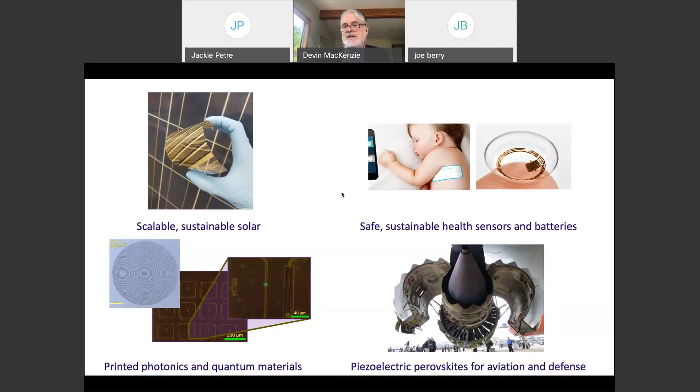Great. And so our work in solar actually fits into our broader picture, all about sustainable manufacturing of optoelectronic sensors and energy devices. And even on this slide, in 3 of these categories, in solar, printed photonics, quantum materials, and in piezoelectrics, we're all seeing these new variants of new hybrid perovskites really coming to the fore. And of course, the reason we're all here is the really exceptional semiconductor performance coupled with processability.

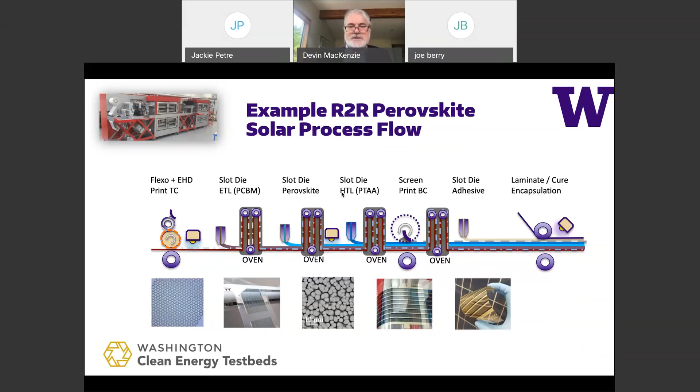And this is one vision of our roll-to-roll perovskite flow. It's not the only one, but it's kind of exemplary. And in fact, we don't just do roll-to-roll. We do sheet-based processing as well, and so we have many users in the lab and researchers in my group and outside that work on sheet-based versus roll-to-roll. So this is not a soapbox to sell everyone on roll-to-roll, and I think most of the insights here could be applicable to sheet-based processing and even other technologies.

And so we'll talk a little bit about the overall roll-to-roll, the key elements for roll-to-roll, and they're really simple: it's all about the substrates. It's inks and barrier, and we've got to worry about lifetime, but the inks, the printing part, the fluid part, although it makes the best pictures, is actually not what I lose sleep over. What I lose sleep over is substrates, cost of substrates, substrate integration, transparent conductors.

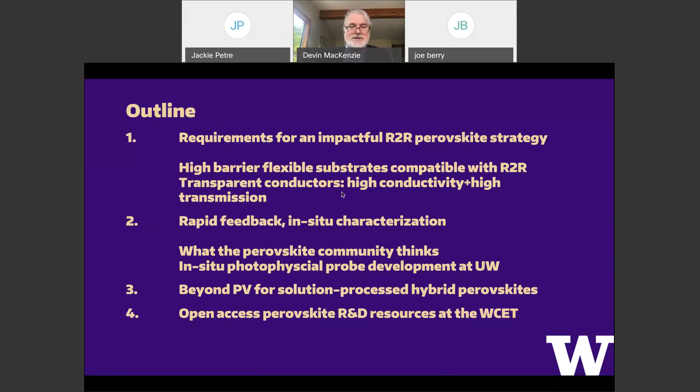Then I'll talk about the in situ characterization work we're doing as part of a Department of Energy funded project we're just wrapping up. And then think about some other applications for solution processed hybrid perovskites and go on and talk about our lab. So kind of overall summary, I think I've shown this before to the audience, but the biggest strengths to me, and I know we're discussing this internally in the USMAP, thinking about writing this stuff up, is it's about low capital cost barrier.

That's, to me, the single biggest barrier to broader adoption of solar, to get solar to be not a few percent of our energy needs, but to be 50% of our energy needs. It's not about another 0.1, 0.2% PCE. It's about reducing the $1 trillion cost barrier it would take to install the manufacturing to actually produce enough solar to supply a significant fraction of our energy needs. And that's where I really think it's interesting. I don't want to just invent another CdTe. You know, we want to go somewhere different.

And the thing that brought me into this was ultra low capital investments to get to really high throughput manufacturing. And of course, roll-to-roll is also inherently flexible. At first, that can be a yoke because it's a challenge, but it can also be actually fundamentally enabling. And that ties in really with the substrate. The challenge is substrates and encapsulation solutions is what a lot of us are thinking about, of course, because lifetime is an open question. But in roll-to-roll, we have additional constraints we want to think about.

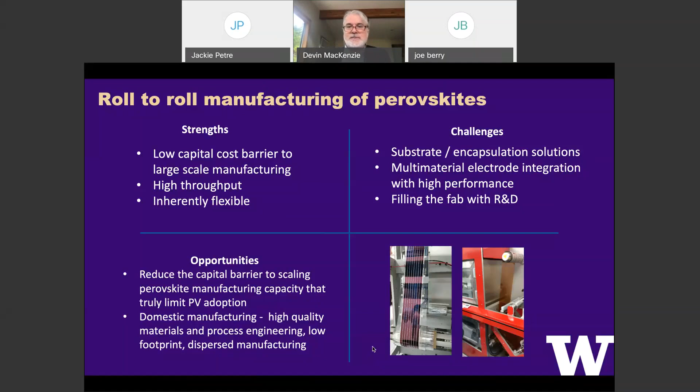But I really think many of us share this idea that this is a real opportunity for domestic manufacturing of PV. It's unclear whether silicon solar cells will ever come back. I tend to not think so. But here we have an opportunity, considering the very, very low capital cost, a workforce need that is not based on low cost, low skill labor, but it's really based on very high precision process engineering, small footprints, can be dispersed in manufacturing. It doesn't have to be centralized. I think that's a real opportunity for domestic manufacturing, and another reason why we're here looking at this.

So first I want to talk about barrier film. So my background, I spent 15 years in industry before becoming a white-haired academic, and I started about 10 companies. I successfully started about 5, got them through the Series A and beyond, at various levels from plumber to CEO and CTO. But multiple of those are in the displays and OLEDs world. And I spent a lot of time working on flexible barrier films for flexible OLEDs. And it's a very challenging picture.

This shows the amount of water molecules per micron squared over 10 years entering from different barrier films. We want a 10-year lifetime. If you're a pessimist, you're going to say that long-term having a water molecule, or maybe oxygen molecule as well, within a carrier diffusion length squared is going to ultimately matter. Maybe it's another way of saying the long carrier diffusion lengths of perovskites and their exceptional semiconductor performance could also make them more susceptible to degradation, because in OPV, the excitons never moved more than 10, 20 nanometers in their life. So if there was no defect in that neighborhood, you might avoid it. Now with perovskites, we have electron wave functions out over maybe microns, maybe even hundreds of microns, which means that they can also interact with defects on a much larger scale. So if we look at that pessimistic view, it can be challenging.

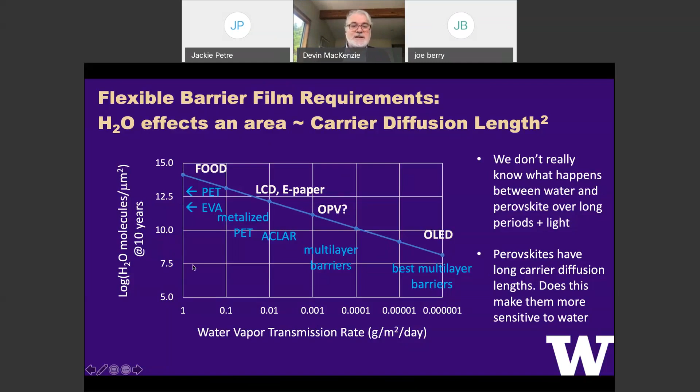We're talking about even the world-class multi-layer barrier films, inorganic-organic multi-layers on plastic, on a polyester, for OLED. Even then we're talking about 10 to the 7, 10 to the 8 H2O molecules per micron squared after 10 years if you don't do other things. Very, very tricky. If we take the more optimistic viewpoint, that H2O degradation is only going to act locally, on each unit cell of the perovskite, say we match one water molecule per unit cell of perovskite. Maybe that's the very optimistic degradation limit: we'll have a solar cell until it literally dissolves. The reality is probably somewhere in between these two extremes. But even in that case, we're still getting near one H2O molecule per unit cell in 10 years. Literally, the film will be, unless we do something different, entirely saturated with the best flexible barrier films.

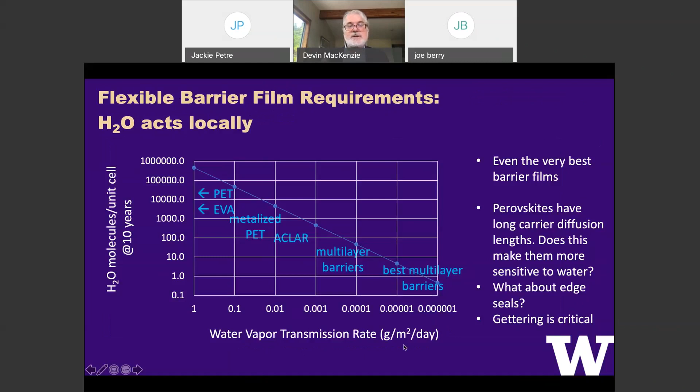And then there's other stuff, like what about edge seals? What do we do to improve this a bit? Gettering. Gettering, I think, is critical. Gettering is fundamental to OLEDs, and there's some really novel ways to use gettering in roll-to-roll that I've worked on, and many others have as well. But even with all that, barrier is not where I place my bets. I think that the real opportunity is in there, and is also a real opportunity in carbon footprint and energy payback time.

That's also an energy investment. But this is not going to use gold. We're going to use copper, whatever. Still, cathode evaporation is a huge fraction of the manufacturing energy consumption to produce PV. And look at

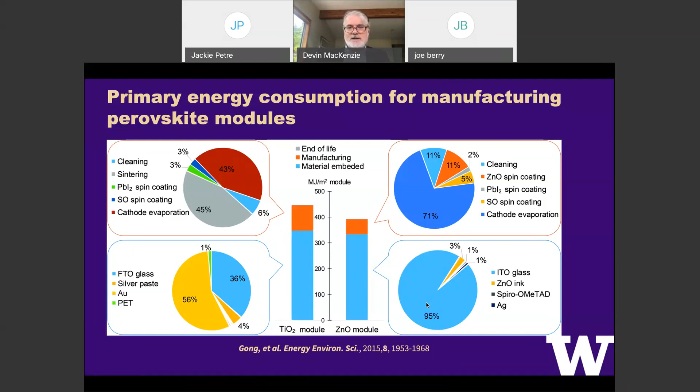energy devices, the majority of it, and the majority of that is just about the glass. It's about the ITO glass. That's where all the energy is. So those are challenges, barrier properties, and this immense embedded energy related to the glass. But that opens up a real opportunity. We're talking about moving to thin glass, moving through processes.

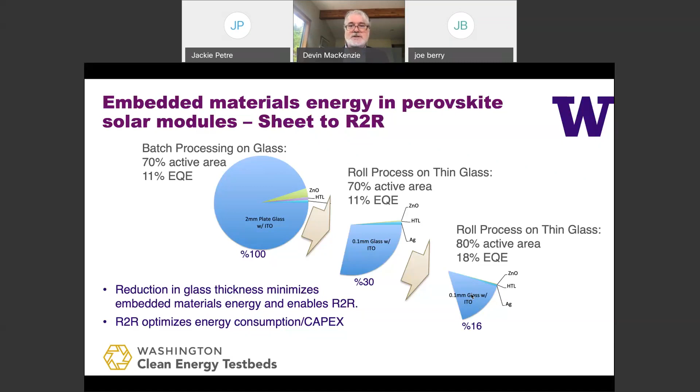As we increase, learning better about edge shields, increase the QE, we can reduce the embedded energy investment just based on using thin substrates, thin glass substrates. Full disclosure, I have a collaboration with Corning, but it didn't happen that they showed up to me and said, here's some money and some substrates. No, I chose them. I saw this is how it's going to work.

My experience in OLEDs and OPV and TFT, flex TFT displays, with moisture barrier films, flex glass to me is the immense opportunity here and a real crucial opportunity. And it touches on several things. Of course, it's thin. 40 micron Willow glass has a rollable diameter of 4 inches, which is quite good. Good enough for most roll-to-roll systems and most processing. It's right on the edge.

And the failures are actually typically extrinsic. They're not intrinsic to the glass. It's not a limitation. It might have something to do with edge defects. It might have to do with shearing, but really extrinsic mechanisms, not the fundamental flexibility of the glass per se, or robustness of the glass itself. I think it can be dealt with from an engineering perspective and overcome. Once we swallow this pill, there's some really great things.

Of course, an extremely high water vapor transmission rate barrier. Permeability of water is extraordinarily low. It's really not measurable. There's really not a technique that can measure how low it is coming out of glass or say thick metal foil. It's many orders of magnitude lower than the best we can measure, which is about 10 to the minus 6, 10 to the minus 7 grams per meter squared per day.

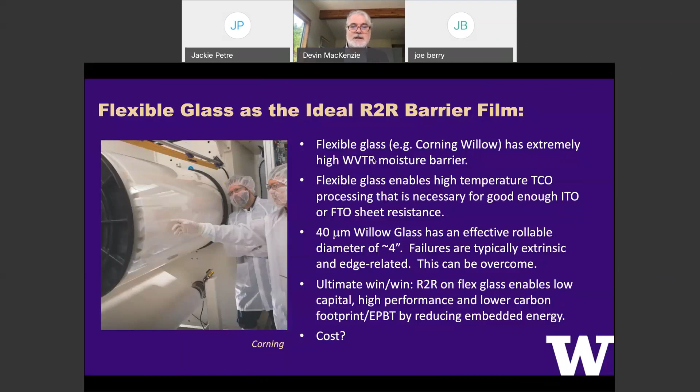So from that, I segue into our next section on in situ photophysical monitors and corrective algorithms. This was a SETO SIPS project. I think we started this in 17 and finally got funds going in 2018, 2019, just in time for a little bit of runway and then COVID.

We've managed to, I think, get some interesting results out of this. And I'm going to talk first about the first stage of this, which was like a roll your eyes. Oh, we have to do stakeholder assessments. That's the new thing, right? That was the new thing at the time. Every grant, you need to do a stakeholder assessment. We grumbled. We set up to do it. Actually, it turns out to be super interesting and maybe one of the best outcomes of this whole project.

So these are confidential names, so I'm not going to reveal who's who, but basically these stakeholder respondents represent a significant fraction of US MAP participants and all the perovskite companies in the US, almost all of them. So we're all there. The interesting thing was thinking about basic stuff we know is important for the process environment.

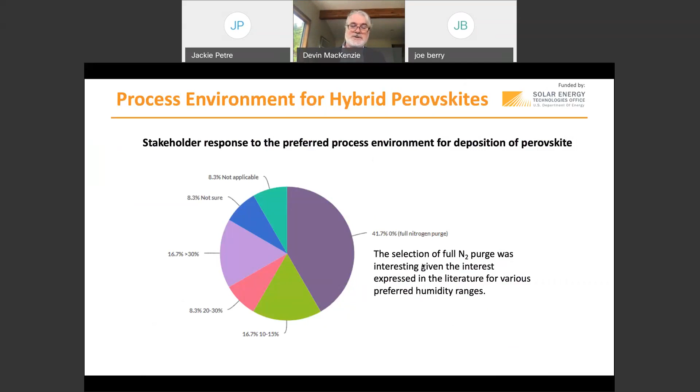Interestingly, the big choice was full nitrogen purge, which I thought was interesting because at the time you look in the literature and people are talking about Goldilocks: there's too much, too little, there's just right, and they wanted these magic windows. But the field actually wants just full nitrogen purge in the environment, and that informs how you would construct an enclosure for roll-to-roll or sheet-based processing. It's important to know. And we developed an enclosure system.

We've worked with what we'll call an air knife, a nitrogen knife. We give the air knife, showing the kind of circular box chamber, locally enclosed, because we only want to have to control the humidity and temperature right near the slot die head and the flow right around the slot die head to have consistent flow.

Up to a full bubbler system, we could actually bubble water into nitrogen to get to a relative humidity. I mean, relative humidity scales are calculated for air, which of course is 20% oxygen and some other stuff. We made water saturated nitrogen and mixed that with dry nitrogen, fed it in at different rates, flowed it on the knife, and we really control that quite well.

With different flow rates we're trying to control at 10%, and within 1 or 2% RH, which is about as good as you can really hope to get. We are able to control extreme excursions when the outside Seattle weather gets to 80% RH externally. But we can also use intermediate room control. We can put rough dehumidifiers in the overall processing lab that bring it down to maybe 50% RH, 40% RH, something like that. Then the local box fine tunes the humidity to what we want.

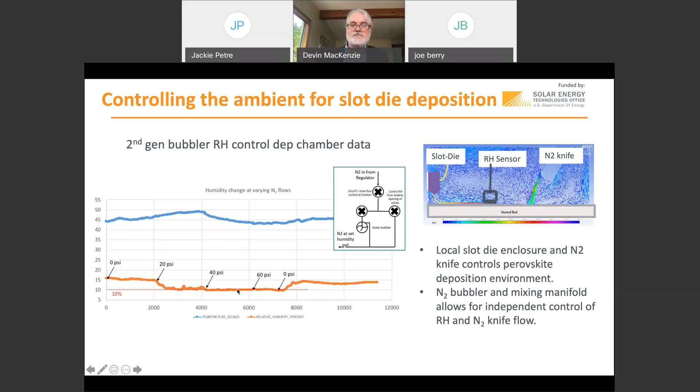It's also interesting to remember that time resolved photoluminescence gives, of course, the minority carrier lifetimes, the basic photophysics, but it's not the only story for making a device. So we can have high lifetime, but not something that makes a very good device. And we'll talk a little bit about that in a moment. We're getting longer lifetimes the more we crank up the humidity, which is the antithesis of where everyone wants to go in devices, and everyone's seeing the best devices at low humidity.

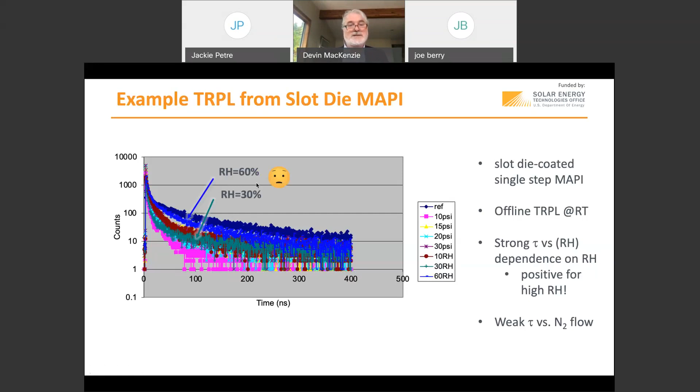Ultimately, spoiler alert, it's about grain size. We can make huge grains at high humidity, and those really big grains can give quite good TRPL signal, but they can make lousy devices. But we took a stakeholder survey. What's the stakeholder choice on the first choice of photophysical probe?

So again, the goal of this project was to develop in situ photophysical monitors to monitor growth of perovskites and feed back in an in situ continuous way. And so there was general strong agreement. Time resolved photoluminescence was broadly accepted as quite useful. It's the most simple but direct way of measuring the optoelectronic quality of the film directly.

Because that would enable us to go and change feedback and change process parameters to fix it if, say, the tau is moving too high or too low. Well, if we can get an answer in 10 seconds, we can respond in a few more tens of seconds and bring the process back under control before we end up printing meters and meters of garbage. We can respond quickly and feed back. And we actually showed that that's really possible with pretty simple off-the-shelf PicoQuant TimeHarp systems, fiber-based laser delivery, a relatively large area detector, but nothing super special.

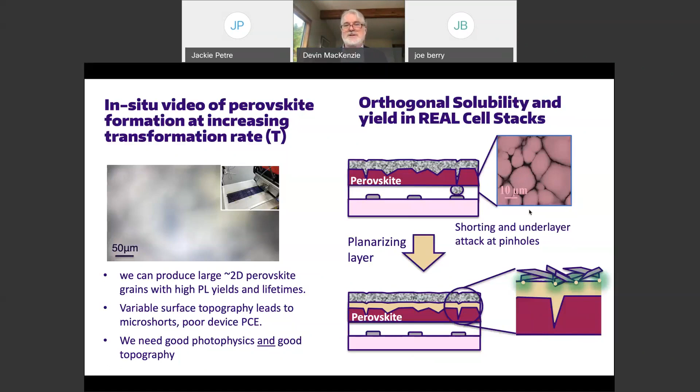But we think that's a real interesting area for us, because as you move to continuous processing and slot die coating, it's a much more controlled process, a linear process, a much more controlled transformation rate. We have the ability to grow textured grains. We have the ability to grow much, much larger grains. On this grain boundary problem, people have done some novel stuff, putting interesting things to fill in those grain boundaries and enable this large grain structure. That's a real opportunity.

So that brings up the question of we need to monitor structure. Initially, we were interested in Raman because Raman was also a way to look at multi-step processes. With Raman, we could see the intermediate phases, not just the final phase. And it was a way to probe structure that was compatible with roll-to-roll, because it didn't involve strapping an X-ray source or something to it. We just needed a reasonably intense laser and some notch filters. But it turned out to be challenging.

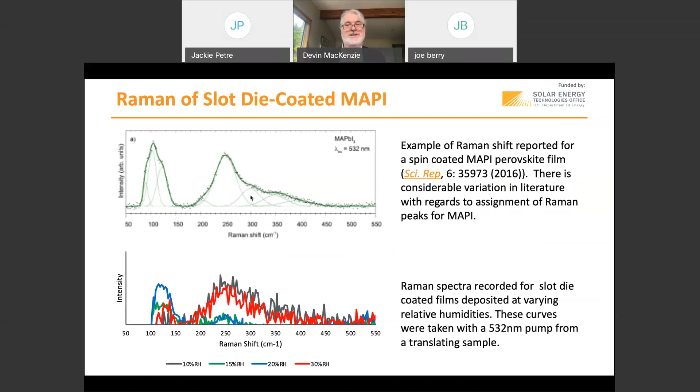This is Raman spectra of films, the literature kind of thing. So we were able to get it, but it's much more difficult. The noise is much more of an issue, because the Raman signal is relatively low until you hit it with immense powers. But the bigger problem was the variation in literature with regards to assignment of these peaks. We thought we'd identify lead iodide and intermediate peaks and perovskite peaks, but there's actually quite a bit of variation of interpretation in the literature. And in the stakeholder choice, very few people were interested in Raman.

And our first choice for the second probe to complement the TRPL was angle resolved light scattering. Angle resolved light scattering is great because it's kind of like a poor person's ellipsometry, in a way, but it can be very, very fast. It's elastic, so we can go sub gap so that we don't have absorption. So we don't have to worry about photo-induced degradation. We can hit it with a big laser. We can put the detectors versus angle and collect in parallel. We can get a lot of signal pretty fast.

It doesn't give as much detail, but we were looking for that signal of rough grain size or roughness. Really, it's actually not even grain size we care about. We care about surface roughness related to the grains. And this was right when COVID hit. We couldn't get into the lab. So we actually developed a code to simulate the scattering profile based on...

So we wrote a really simple code. It was not meant to be really quantitative, but it was to show us the range of scattering angles where we're likely to see interesting stuff happen, and to inform how we're going to build our actual in situ angle resolved scattering rig.

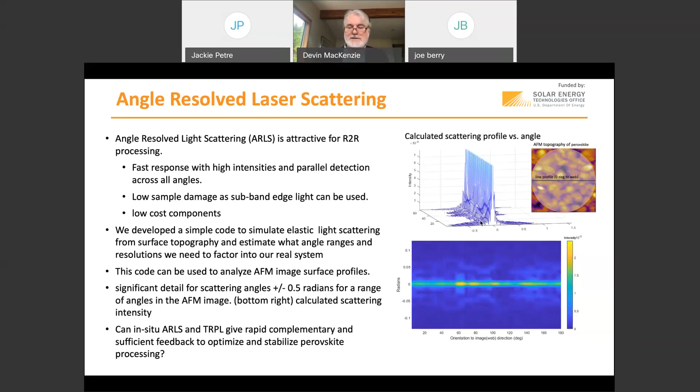Again, this is just trials, not meant to be numerical, but it shows that probably within half a radian is where most of the interest is happening, so we used that to refine our ARLS scattering rigs. We started off with a simple prototype where we mounted a discrete large area photodiode, because we thought we'd be starved for signal, and we proved that worked, but it didn't have enough resolution at those low angles. So we've now moved to a linear detector system at low angles, so we can get better resolution there.

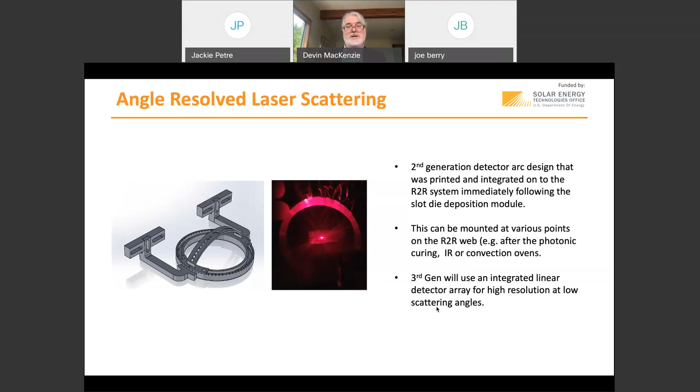And it turns out now that we've moved to a 790, 800 nanometer laser, there's not much absorption there, and we can hit the film really quite hard. So we have plenty of signal to drive the linear detector array. And so we think that's a really good coupling: TRPL to give you the photophysics, and angle resolved laser scattering to give you an idea of surface topography related to devices, and both of those can feed back fast. Great. So that's our in situ monitoring.

Now I'll touch on some of the other areas we work on to try to enable this. One of them we already alluded to, which is transparent conductors, ITO. For plastic substrates, as I'll show you in a minute, it's basically a non-starter because the resistivity of the ITO is too high due to the temperature limitations of plastic substrates. But we also look at other applications. This is a photovoltaic light panel built into a building; these are actually amorphous silicon. Really interesting applications in tandem.

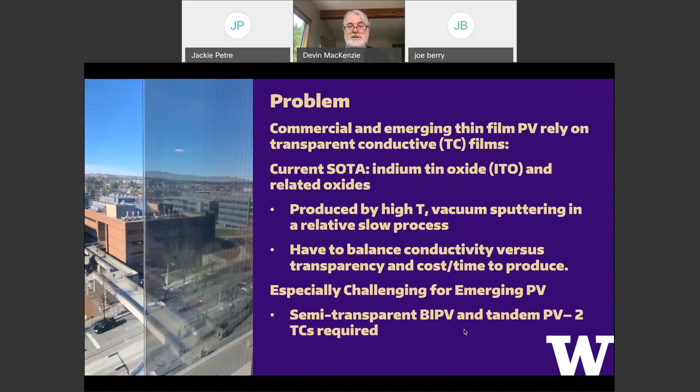Well, in tandem, of course, we actually need two transparent conductors. There are different builds, but in one of the preferred builds the transparent conductor goes on top of the perovskite, not underneath. So then we still have that temperature problem. We're obviously not going to 300 C on top of MAPI. So it's an interesting challenge.

And here's some transparent conductor loss calculations. For good transparent conductors, you take the resistive losses and the transmission losses due to absorption in the ITO. But if you look at what's available for ITO on plastic, getting 40 to 60 ohms per square at 85% transmission, which is also not great, we're talking about 30 to 35 percent total loss just from the ITO, from I squared R series resistance losses and transmission. That's a non-starter. So what do you do?

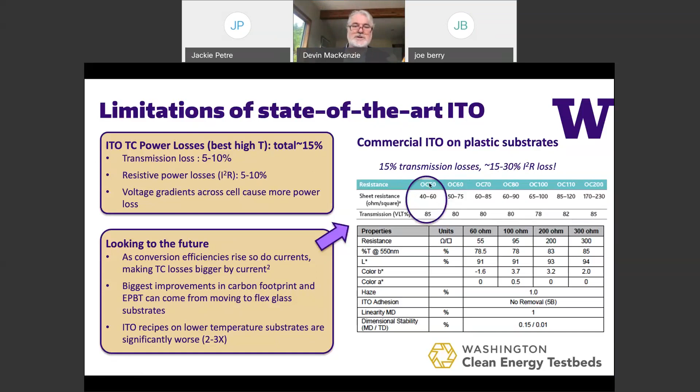Well, think about what they do in silicon. They don't vacuum deposit grid lines on silicon PV, because we need low resistance and low shadowing, and that's hard to do. We need to grow vertically to get more metal in a small footprint. If you want low resistance and low shadowing, you need to go vertical, not lateral. And of course, vacuum depositing is also subtractive. We want 90+% transmission, so if we throw down a bunch of gold, we're going to etch away 90+% of it, which is very wasteful.

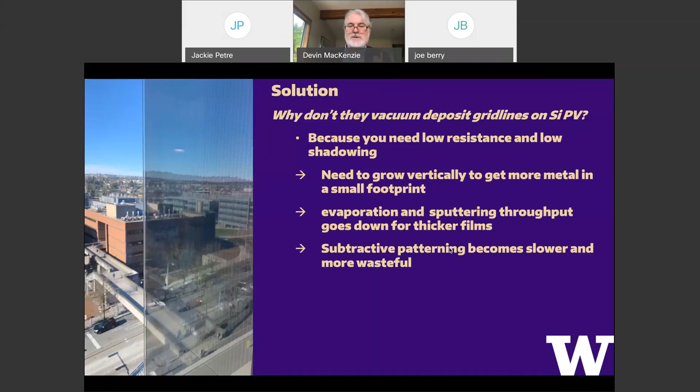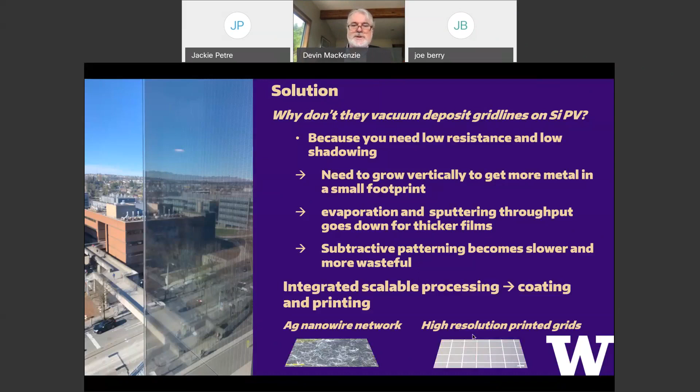So there are approaches to solve this: either we use a network of nanowires that are percolated and interconnecting, or we go to intentionally high resolution printed grids. And we've touched on both of those. We developed slot die coated nanowire composite films. The nanowires are readily synthesizable and makeable, and they work actually pretty well, surprisingly well.

There are many recipes out there, but the fundamental problem with nanowires is roughness. If you have one of those wires pointing up at an angle through a film, you have a short, or at least a micro short, and that can be a yield killer. So we encapsulate it in PEDOT, or in an oxide. This is probably tin oxide.

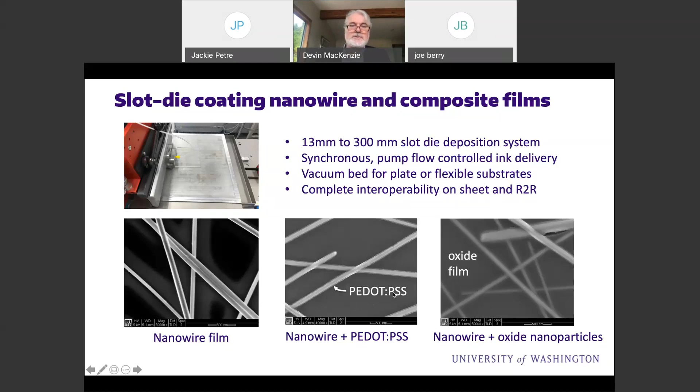Embed those in the coating. It's a continuous solution of PEDOT, continuously, and we get some quite good results versus ITO. And this is all done at very low temperature, 70 degrees C max drying, and you could probably develop it lower than that.

So the good news about that is that now we could go on plastic substrates. We could even potentially go on top of perovskite, but we're still having issues with yield. There's still questions about the roughness of that. And there's some strategies, but fundamentally that's an unstable system when you have these wires sticking out everywhere.

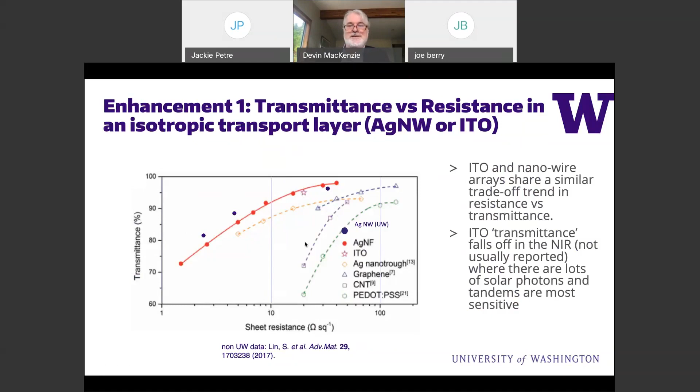So we looked at what we do well in the rest of our work in our lab, which is ultra high resolution printing. And so we did some modeling simulation to show that combinations of a printed grid plus a relatively mildly doped high sheet resistance transport layer can actually achieve very, very attractive figures of merit. So this is the example, 1% power loss from sheet resistance. Remember, we're talking about 10 to 15%; this is much lower than the power loss from the sheet resistance of ITO. And these are all scaled to 90% transmission, all the data here.

And for example, say an antimony tin oxide, 5 kilo-ohms per square, a very mildly doped transport layer, we actually get this to 1% power loss from sheet resistance, and it's possible. Of course, this is all hand waving. So how do we make that a reality?

So one of our specialties in our lab is printed electronics broadly. And of course, I've spent plenty of time working on conventional flexographic printing or gravure printing, conventional inkjet. The drop is say 10 picoliters, and maybe you can get 1 picoliter, but that's somewhere between 50 and 10 microns of effective printed line width because the drop is going to spread.

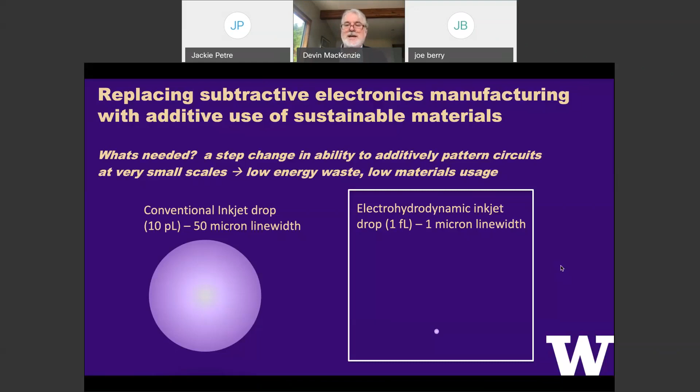But it's also really interesting for the grids: the finer we can make the grid, the higher the performance of the combined grid and transport layer, basically. And so this is very attractive, and it also becomes essentially invisible. It's essentially transparent to the eye. You can't see these lines at these sizes. And we've been working on this process. Electrohydrodynamic inkjet's been around for a while, but it hasn't really been a well-developed manufacturable technique, and it's only been demonstrated in some very specialized materials.

We work directly with SIJ Technology tools, and we're the world's first multi-nozzle roll-to-roll system. So a monolithic multi-nozzle plate like you would see in the Epson inkjet on your desktop, where you could have hundreds or even thousands of nozzles in a head. And that's critical for this. Why? Because the great news is we're printing a micron at a time. The bad news is we're printing a micron at a time. It takes a long time to make a centimeter out of a micron, unless you can print a lot in parallel. So for conductors and simple electrodes, we essentially need an array of nozzles blasting away at the right pitch, continuously depositing lines to make our transparent conductors. So we're demonstrating that for the first time in roll-to-roll.

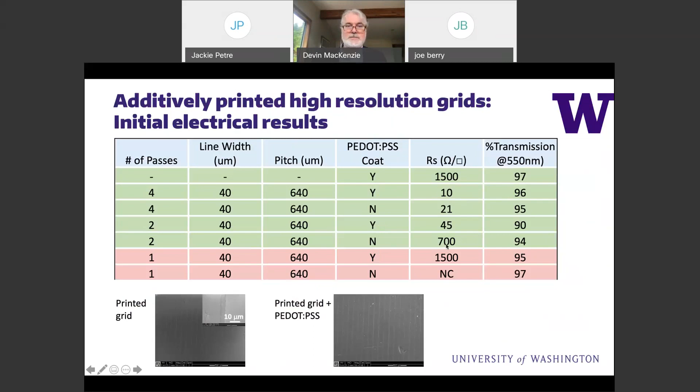And in this example, you can see we have some limitations, but transparencies of 96%, and that's a combination of printed grid plus, in this case, PEDOT:PSS, but not heavily doped PEDOT. This is like OLED grade PEDOT. I can't remember the resistivity, but this is the HIL or hole injection layer type for OLED, which is relatively low conductivity, high resistivity. And with that, 10 ohms per square on that. So pretty promising stuff.

And this is an example of that. This is the print from SIJ. We've been developing this. Actually, it's a lot of lines, and these are probably about 7 to 10 microns, continuously printed in one pass to produce this sort of resolution.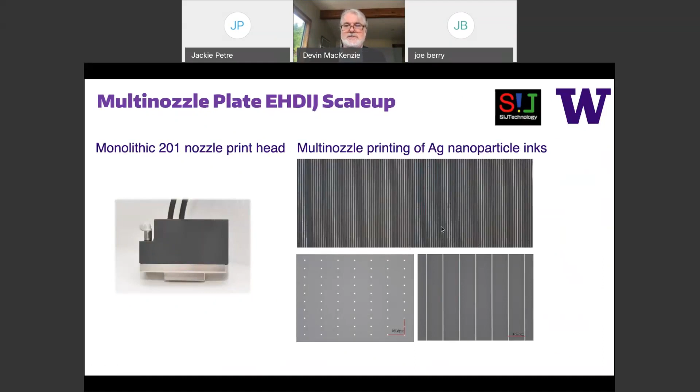So pretty promising. And so watch the space. We also use this to print. I'll mention some of the other materials. We also use this to develop photonic and quantum materials.

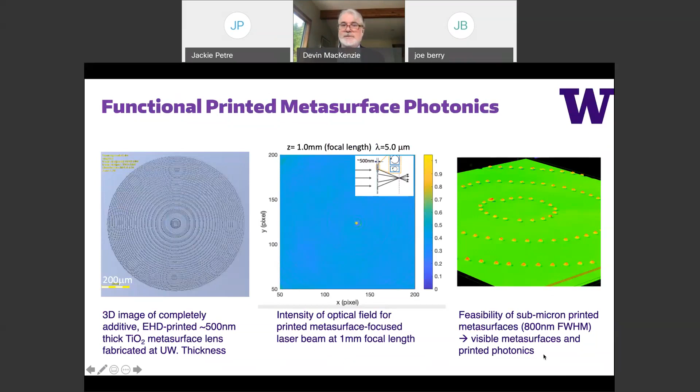Other applications we're looking at: perovskite. So I think, broadly, we always talk PV, but actually perovskites is a whole semiconductor area. But also things like piezoelectric. It's like hybrid perovskite, low temperature solution process. We deposit at sub 70 degrees C, slot die coated. Solution process.

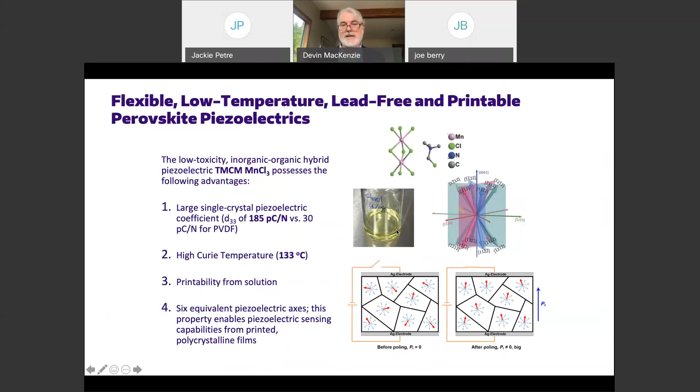So we developed this concept, developed the inks, and also developed a test structure for this. This is based on that ultra high resolution metal print, slot die coating of this piezoelectric perovskite to produce fully printed flexible perovskite vibration sensors. This would detect, say, missing rivets on an airplane wing or bullet holes in a fighter jet or something like that. We could actually pick up and even directionally identify the direction from which a vibration is coming with the correct sort of array of sensors.

Here is technically probably the hard part: get this thing stuck to the surface and measure. And this is inkjet printed, our first demo of this in an actual sensor. We see the response of the sensor. When we go to resolution 15 micron IDEs, we increase it almost an order of magnitude. So a very promising area, kind of expanding on the palette of what we can do with these novel perovskites.

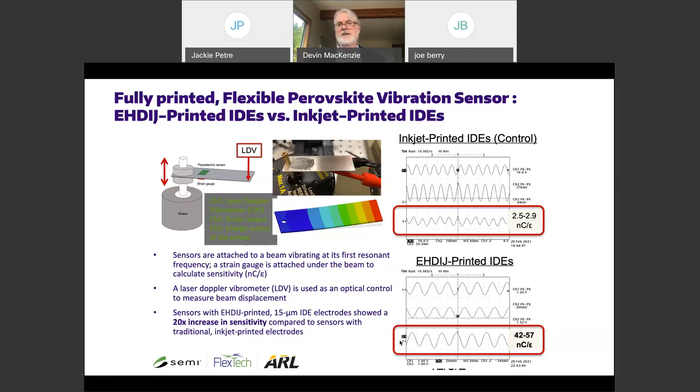Last, I'll wrap up and talk about the resources we have for everyone to access this. I tend to be very open in my presentations. I don't hide a lot of stuff because part of the reason I came to University of Washington was to make an impact through the Washington Clean Energy Test Beds and providing open access resources to academia, government, and industrial users. And we have probably over 450, maybe 500 users at the lab in total. We're recovering from COVID. We are actually fully operational. Now we're actually matching and exceeding the pre-COVID usage of the lab.

So we're super excited. And really the key is a couple things. We have world-class equipment provided generously by the state of Washington. We have world-class staff, and we have a really great working model where we can engage through normal funded research, like a DOE funded project, like the ones we're negotiating now, or you can actually contract us to do work for you. You can have our staff do work, or you can actually get trained on our equipment, and we're a 24/7 operation, access the lab at any time.

Either of those last two, if you're paying to use the equipment, which is heavily subsidized. The equipment is free. We're only charging to recoup the operating cost of the equipment. You maintain 100% IP ownership of anything generated. So it makes it a very unique university environment, that there's essentially no university claims on any of the intellectual property, and very attractive for companies.

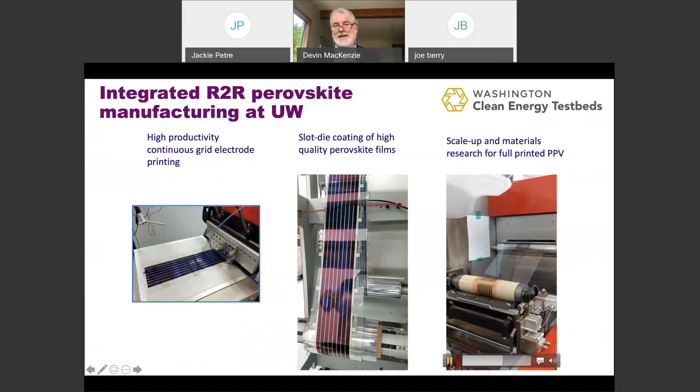And again, I just want to say we have stuff here. This is a real perovskite coming off our line, you can see on the right. These are very photogenic, but probably only 1% of the time are we doing this printer, because in an hour this printer makes a month's worth to look at. But probably 95% happens on flatbed, which can be on flex, plate glass, silicon wafers, it can be on anything.

So we don't just do roll-to-roll. In fact, we predominantly do other stuff, as either the end game, which is certainly the end game for many people who are perfectly happy to work on plates, or the feed to the roll. And the coating systems we use are identical. More than identical, they're the same thing.

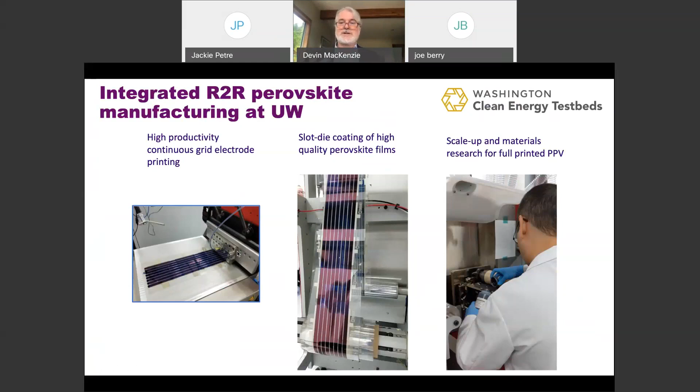We can do 100 millimeter. We can go to 300 millimeter wide. That die head goes onto the roll-to-roll system as well. So you can literally pick up the head and the full ink delivery system, take it off the flatbed coater when you're ready, and move it to the roll-to-roll. And nothing has changed. It's the same head with the same liquid in it. So we're trying to get really good transferability of technology.

This isn't meant to be an eye chart, just for future reference. The point here is we have lots of deposition tools, and a lot of characterization to support it, all under one roof. You don't need to go off to Charles Evans or send it across the country to get a result. In literally 90 seconds you can walk over to an instrument and get the feedback you need: surface morphology, composition, X-ray, whatever. And within minutes of encapsulating your device, you can go and test it too.

We have AAA plus IV testers for cell test. We have EQE systems that go up to, I think, 12-inch mapping. And we also go to full-scale flash testing of modules and huge walk-in environmental chambers for testing banks of modules. So we really keep all this under one roof. That's really about fast feedback. You can iterate fast, doing an experiment in hours that could take you weeks if you had to access different pieces of equipment across campus or at different locations.

Another important component, headed up by a close colleague, David Ginger, whom many of you know, is the research and training test bed. That's also part of the test beds and accessible to external people. It's on campus and has a student focus, but it has world-class tools, staff, film deposition and test, catalysis, nanoparticle, battery coin cells, all sorts of characterization.

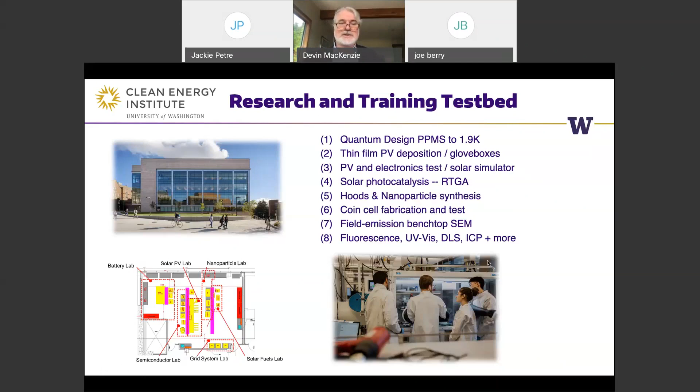We run a really special course in one quarter, really 10 weeks. We run through 5 different lab modules where people build PV cells from scratch. They build battery cathodes. They do a grid simulation, 5 different modules, hands-on in one quarter. And Dave Ginger really headed that up and has made that a reality in our lab.

We also have other facilities on campus. An example is this interesting perovskite scanning probe microscopy in the MAF, the Molecular Analysis Facility, also an open access, industry-accessible facility. Everything from photo mapping, the TIR, the tunable infrared, to large-scale mapping, to new things like the Cypher, which is environmentally sealed, with high video rate imaging and light, so we can do time-dependent maps.

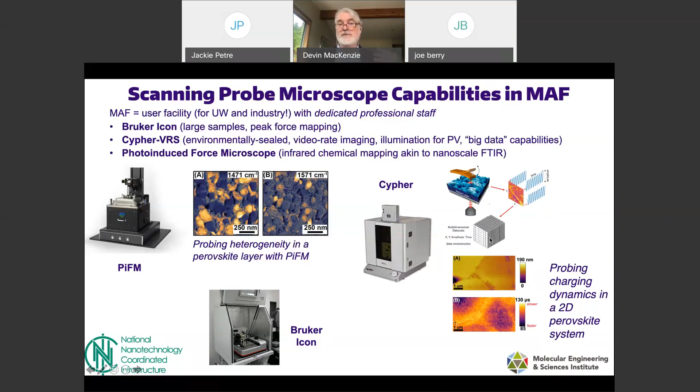It's video, very high speed AFM, and we can build experiments and actually look at it, and that involves lots and lots of AFM scans, which means huge quantities of data. So this has the computational support for those huge blocks of video data, time, 4-dimensional data, and analyzing perovskite and other films.

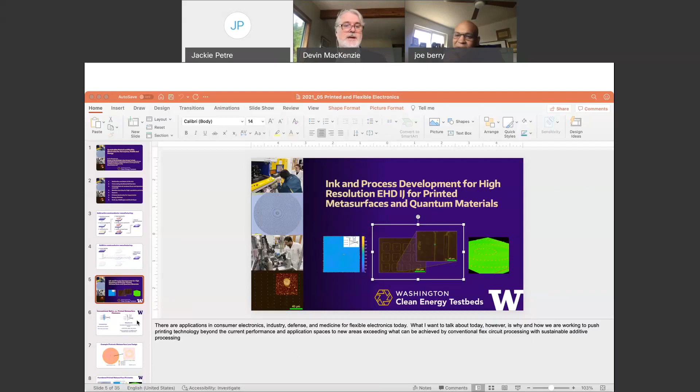So that's a good question. And I think there's impact sensitivity, but a lot of it is extrinsic. So, for example, even when we do the roll-to-roll, it's a statistical issue. We can run for a very long time at tighter than 4-inch circumference, kind of exceeding that. But then there's some edge defect, and you get a total failure. And I think it's the same for the impact testing.

So it's statistical. There are people, they laminate. One of the options is to laminate to like a polyester or something to provide better impact resistance too. So that's an angle that I've seen done, not within our project, but previously, before there was Willow Glass, there were other players in this space, and Vitriflex and a few other people were doing that to good effect. It's a good question. Corning has that data.

Sean Garner, whom some of you will know, is super. Everyone at Corning's great. Sean's super expert in that. Reach out to him, and he knows a lot about flexible glass, a lot more than I do. But there is definitely impact testing data. It's not something that we do. Okay, fair enough. But obviously, we've got to worry about hail.